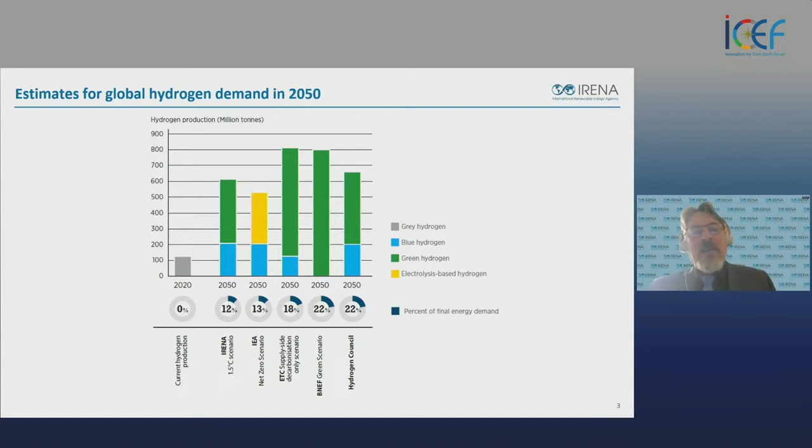We need a smart approach to integrate electrolyzers into power system synergies with renewable energy. Some innovation is needed here, as we looked into at IRENA—you cannot just integrate electrolyzers into the existing energy system and use excess electricity to feed them when there's an oversupply. That doesn't work, because you need dedicated supply for the electrolyzers; you cannot ramp them up and down all the time. There are ideas to use module-based electrolyzer systems, but this still has limitations, so more innovation is needed to better integrate electrolyzers into the energy infrastructure. Next slide.

Given the relative scarcity of green hydrogen and its price, we see priority uses for hydrogen in the end-use sectors, and other sectors should be electrified. Electrification will increase from 22% currently globally to over 50% by 2050, which would allow us to electrify many parts of the end-use sector.

But as I said, some of the sectors you can only go through indirect electrification, meaning using electricity and water electrolyzers to produce green hydrogen.

There we see the dominant use, especially at the beginning, because of the inefficiencies of the value chain to produce renewable power from renewable sources, then to produce through water electrolyzers green hydrogen, and then to produce methanol or ammonia, and then to crack the ammonia again, which is quite challenging in terms of efficiency. That means, given the cost of green hydrogen, it's not yet competitive to fossil fuel-based hydrogen.

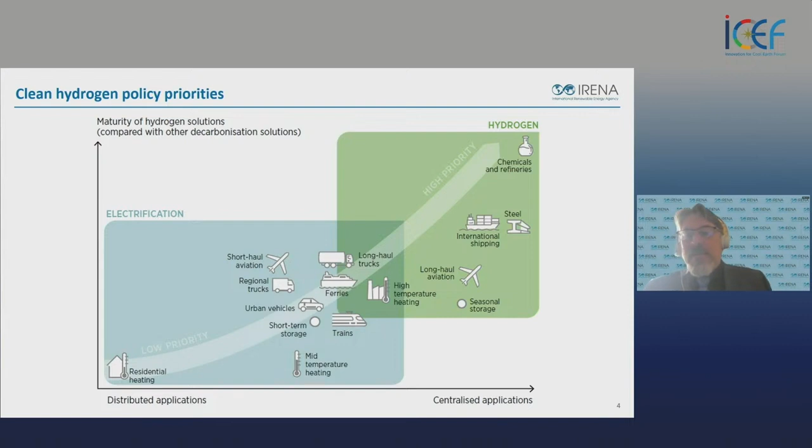In reality, we have to bring down the electrolyzer capex from 1,200 US dollars per kilowatt installed to something like 600 US dollars per kilowatt installed. So there is still a job to do to ramp up the manufacturing of electrolyzers to bring down the capex to create competitive green hydrogen.

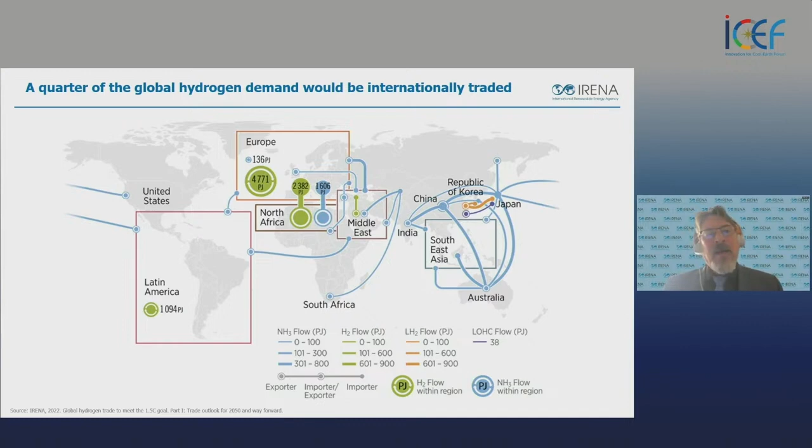This is also specifically important for Japan. I think the hydrogen will come to Japan likely as ammonia, and to a certain part also as methanol. But of course, Japan is using a special technology with liquid hydrogen carriers. Next slide.

The way you transport the green hydrogen depends predominantly on the distance. With a wider distance, over 10,000 kilometers, you end up with ammonia. But at shorter distances, up to 4,000 to 5,000 kilometers, transport over pipelines is also important.

IRENA is working with ports and harbors and also with the shipping sector, with the International Maritime Organization, the International Chamber of Shipping, and the Global Maritime Forum. We are looking into ways of decarbonizing the shipping sector. The shipping sector is quite efficient, also based on heavy sulphur fuel oils, but the shipping sector will play a dominant role in the trading and logistics of green hydrogen between different countries.

There is a big possibility, when this sector moves into the logistics of providing and shipping green hydrogen in hubs and harbors and with ships, that this sector can also be decarbonized. We are just working on a study related to this.

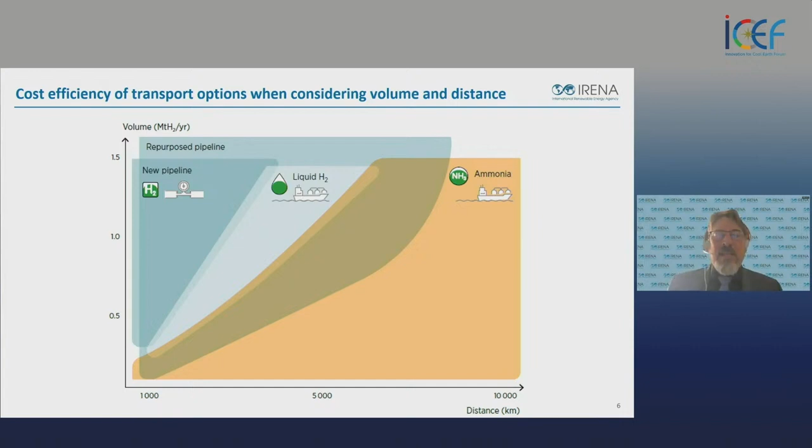In overseas trading, different carriers are included. I mentioned already the ammonia, but also the liquefied organic hydrogen carriers, and liquid hydrogen could become viable. Ammonia is already produced, stored, and traded on a large scale, over 120 ports, and plays an important role in the logistics of hydrogen, specifically with an ammonia infrastructure. Ammonia can be used as an industrial feedstock and as a maritime fuel for power generation, and the cost for transporting hydrogen via liquefied organic hydrogen carrier is comparatively low.

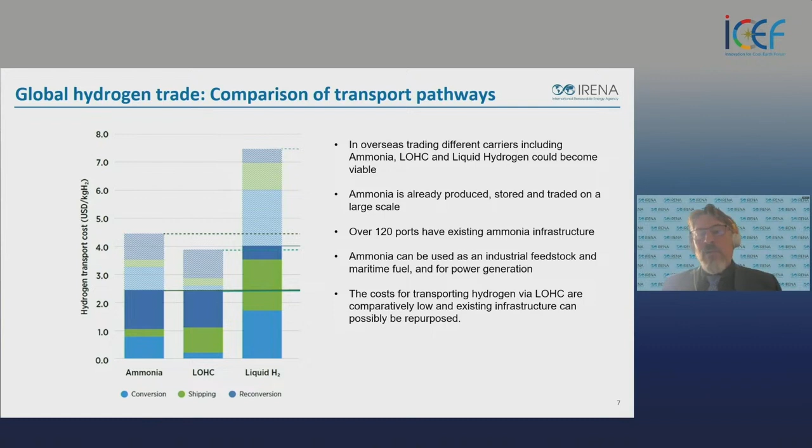We did a study on this on behalf of the Japanese G7 presidency two years ago. Liquefied organic hydrogen carriers have some cost competitiveness advantage, but they are not widely used. Carrying hydrogen through ammonia and methanol is more widely used, and some work still needs to be done to implement more use of liquefied organic hydrogen carriers.

Next slide—Roland, this is your last slide, I think? Yeah, this is my last slide. Just to say, it is extremely important to harmonize the certification and the quality infrastructure.

Certain standards are needed to make sure at the end we are able to create a market for green hydrogen. IRENA is working together with the International Organization for Standardization, also with the International Electrotechnical Commission and many other players, to set up the harmonization of quality infrastructure with elements of metrology, testing, and all aspects of certification and standardization.

That helps to create a green hydrogen market. I think the key challenge is to bring down the cost for green hydrogen, to make sure that more climate finance is used to ramp up green hydrogen production, and to bring more green hydrogen projects to final investment decision.

Only 4% of the projects in development have reached final investment decision, and a lot of work is still to be done to create an international green hydrogen sector to decarbonize the end-use sectors and to achieve the 1.5 degree scenario. I would like to stop here with my presentation.

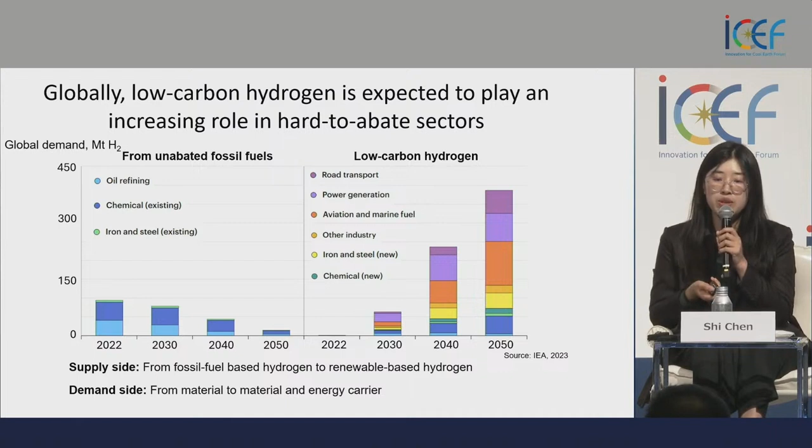The final demand sector will also become more diversified. Besides the existing chemical sectors, in the future the transportation sector—heavy-duty road transportation, aviation, and maritime transportation—will need hydrogen because it has very high energy density and can reach very high temperatures. Applications in industrial sectors like iron and steel, and new chemical sectors, will also increase. So from the supply side, hydrogen will go from fossil fuel-based to also renewable energy-based hydrogen, while on the demand side, hydrogen will become not only a material but also an energy carrier.

This is kind of a chicken and egg problem, because if we don't have low-cost production supply for hydrogen, there is no momentum for the transmission, distribution, and end-use sectors to invest in hydrogen utilization. And without support from the downstream supply chain, there is also no momentum to invest in production. So efforts should be put into every single sector of the entire supply chain to make true progress. Next, I'd like to show an example of renewable energy-based hydrogen, and how to move from the current high cost of low-carbon hydrogen to a future competitive low-cost hydrogen.

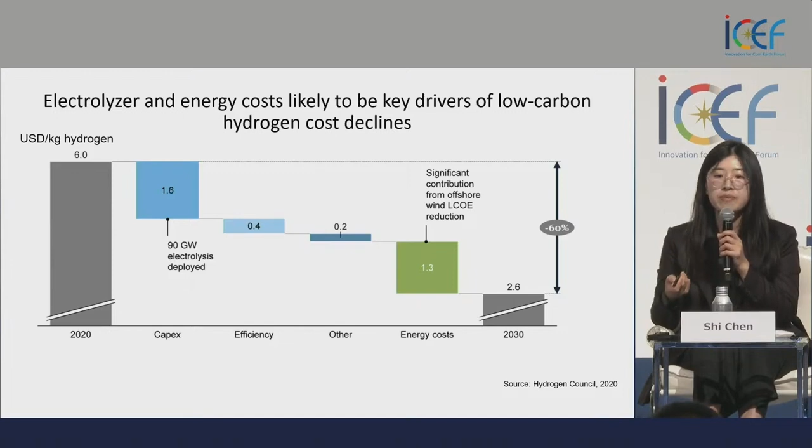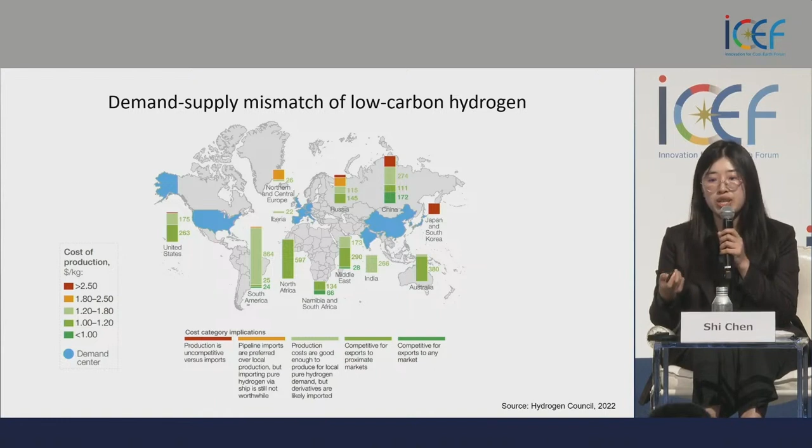Another challenge I want to mention is the key materials utilization in electrolyzers and fuel cells. Here's an example of the PEM, the proton exchange membrane electrolyzer. During the manufacture of this kind of electrolyzer, we need input from platinum and iridium from the supply chain. But currently, all these metals are concentrated and attributed to the supply of South Africa and a few other countries.

So here are two questions ahead of us. The first is how the fluctuation of the cost of these key metals will influence the cost of the electrolyzer, as well as the downstream cost of hydrogen. The second question is whether the economic reserves of all these metals will be sufficient for future massive production of electrolyzers.

Okay, so here I'll summarize my three points.

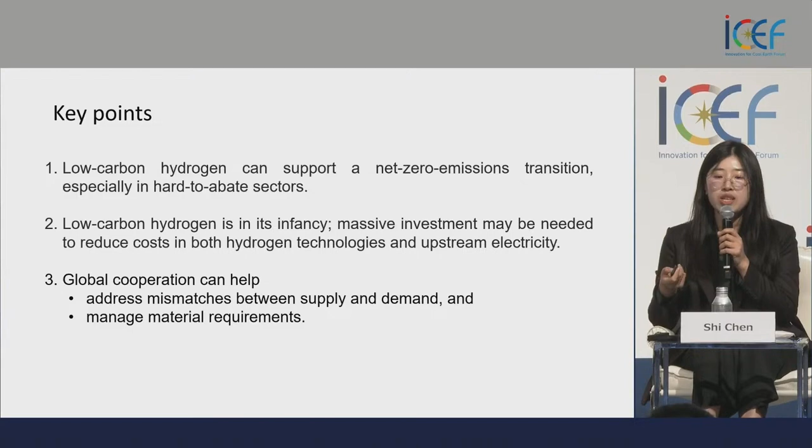First, low-carbon hydrogen can play a role in decarbonizing hard-to-abate sectors. Second, low-carbon hydrogen is still in its infancy, so massive investment would be needed to further reduce the cost. Third, global cooperation would be needed on a massive scale to address the mismatch between supply and demand, and also to manage material requirements. So that's all, thank you very much.

Chen, thank you very much for that really interesting presentation. I think the point you made about minerals and the need for platinum metals, for example, doesn't get a lot of attention. Could you say another word about that? Do you think that the supplies could be diversified? Do you think that innovation is possible so that different metals would be used?

Definitely. I think two efforts would be needed. The first is technology advance. For example, if we have a higher efficiency electrolyzer, proportionally we will need less electrolyzer into the future, so we'll release the pressure on the metals. Additionally, we will also need market mechanisms from a global perspective. For example, we could have long-term contracts to ensure the price fluctuation of these metals wouldn't be transferred to downstream utilization.

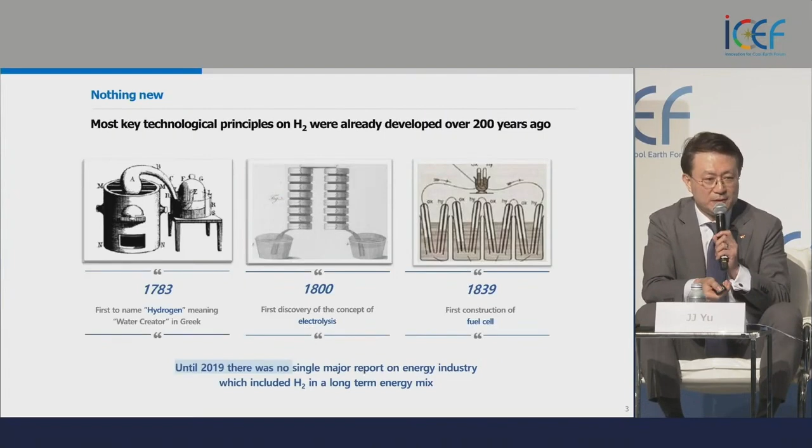Okay, because time is running out, I'll move into the main point. This is an old concept, but it was only in 2019, just 5 years ago, that it suddenly got attention—hydrogen. Before this, there was no single major report to include hydrogen into the long-term energy mix. So it was only 5 years ago that it got attention. At that time, as I mentioned, this was first hype, but already this year and last year, people began to talk about make or break.

I think it's a lot of reasons after COVID, economic situations, but a lot of progress has been blocked and setbacks. Why is it happening? I believe everyone can remember this hydrogen shot, 2021. The Department of Energy in US announced their hydrogen shot 111, making 1 kilogram of hydrogen at $1 in 1 decade. That was June, and in July I met with the director of this DOE. He was very confident he can achieve this goal, and he explained the detailed plans of how they can reduce the cost of each component of the value chain, manufacturing, especially electrolysis.

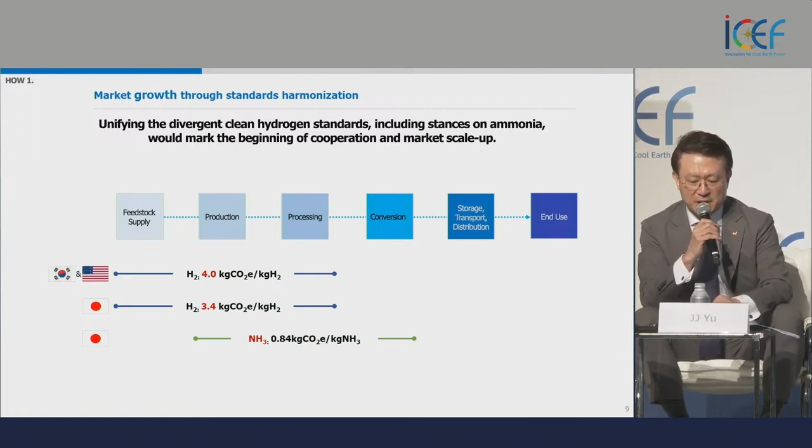Chen also mentioned everyone says huge investment is needed, but how we can draw or invite those investments starts from clear definitions and regulatory frameworks, so that commercial players can see the bigger market and have bigger investment potentials.

Some regions can still produce hydrogen at $2 or $3, below $3, but I'm talking about the overall general level of production. So with the US as an exporter and Japan and Korea as importers, if we work together, I think we can create a lot of progress in this hydrogen frontier.

Korea has been advanced in developing this regulatory framework, and already 3 years ago we started this. The program now is through KEPCO, which is buying hydrogen additions in power generation by subsidizing the cost gap between traditional and this more expensive hydrogen-added power generation. Bidding already started, so sooner or later, latest from next year, this program will really be executed. The Korean government is very committed to this further progress.

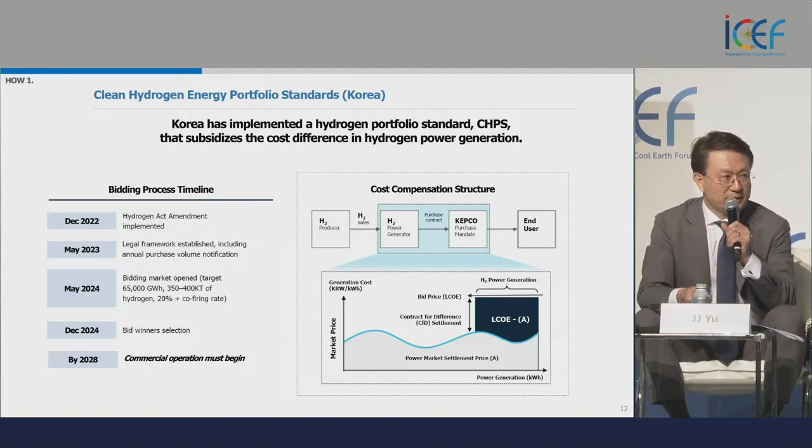It's always about the money - how you're going to allocate subsidies and funding between renewables and hydrogen. There are a lot of competing items to get more subsidies. That's why I'm saying, like the Chinese government developed the electric vehicle industry with substantial, consistent support programs so we can have predictability. That might be the incentive for commercial players to join this region.

Because I'm talking about Japan, Korea, US collaboration - Muraki-san is my senpai and knows a lot about this area - Japan and Korea, for example, will import, as many people have already mentioned, ammonia, which might be the most effective and efficient carrier to import hydrogen. But Korea is already importing more than 1 million tons of ammonia, whereas Japan is only importing less than 300,000 tons per year.

In the western part of the Japanese island, it's a shallow sea area. Korea is closer, and for example Ulsan port has large tank terminals for ammonia, so bulk breaking from Ulsan might lower transportation costs by 20%.

I know Muraki-san will explain further details about this area, so there are many areas where we can collaborate together in technology or regulatory framework rule setting - and in electrolysis, whether it's SOEC or other areas, there are many areas we can combine.

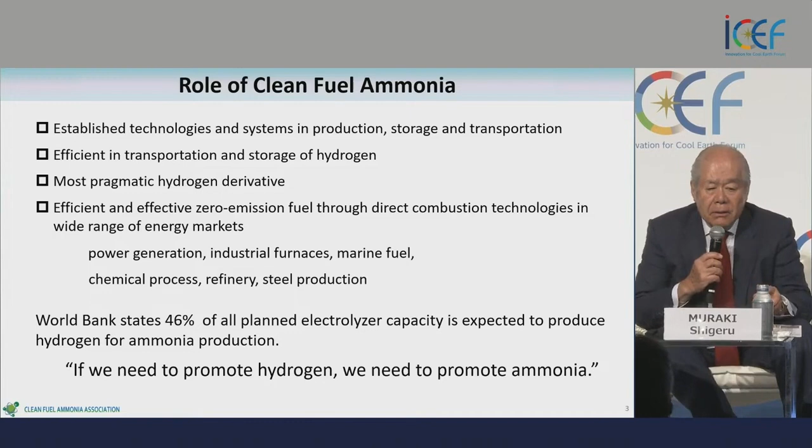Technologies for direct combustion - ammonia substitution in coal-fired boilers. JERA conducted a large-scale demonstration in their 1 gigawatt coal power plant with a 20% mixture of ammonia, and they confirmed emission control: no increase of NOx emissions, no N2O emissions, and no unburned ammonia. So they are now moving to the commercial phase.

They will start commercial use of ammonia around 2027, and the main target for power generation is gas turbines. Two companies are working on that, developing 2 megawatt to 60 megawatt gas turbines very well, and single fuel gas turbines will be developed by around 2025. 300 to 400 megawatt large-size combined cycle gas turbines will take a little more time, through the 2030s, when I think the lineup of gas turbines will be ready for the market.

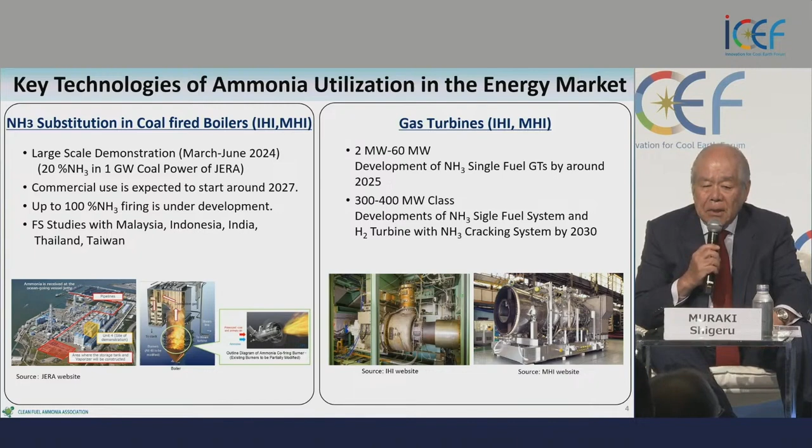And for industrial furnaces, Taiyo Nippon Sanso is working with Asahi Glass on development of ammonia single fuel burners, and they will finish the development of the burners in 2025.

And a very important development is marine diesel engines. Small 4-stroke engines have already finished development, and one was installed in a tugboat by NYK in August this year. They are conducting safety tests of ammonia utilization in the engine room.

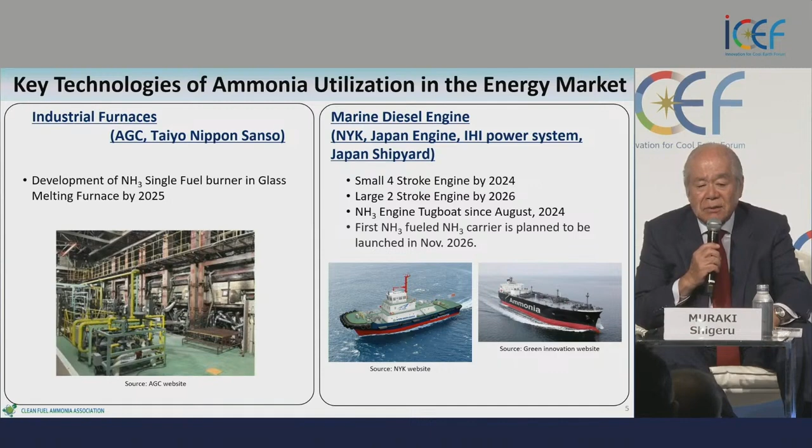And the large diesel engine will be finished by 2026, and the first ammonia-fueled ammonia carrier is planned to be launched in November 2026. The Japanese government is preparing about 3 trillion Japanese yen for 15 years.

That's about 22 billion US dollars, to subsidize the cost difference between ammonia or hydrogen and existing fuels for the first movers, starting by 2030. And ammonia has a lot of supply potential projects, and they are working to propose to this CFD program.

And on the market side, we are planning the hub and spoke system. Now 6 areas and 8 terminals are proposing the hub terminals. And as JJ mentioned, the chart doesn't show the Korean part, but I think Korea and Japan can share the hub terminals to deliver ammonia to various areas of demand.

The demand forecast in Japan for 2030 is 3 million tons, mainly from coal power plants. We are working on collaboration between Japan and Korea for supply chain development, seeking conditions for a long-term contract with a price formula, particularly for blue ammonia from the United States, and we are planning to use the Henry Hub price.

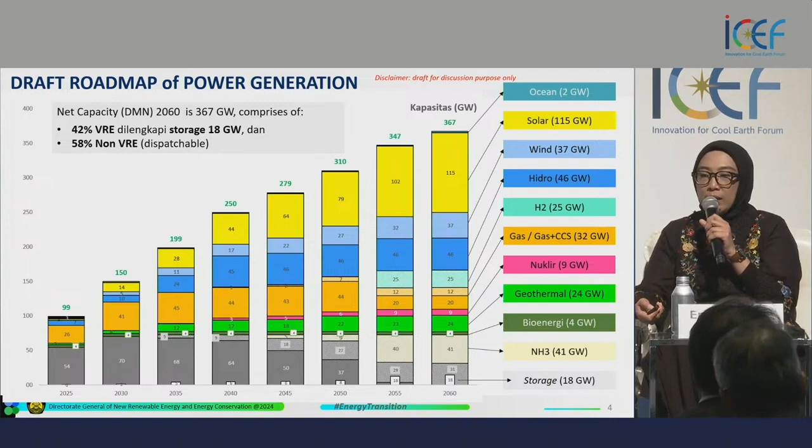So we replace it with the renewable one. Hydrogen would be 25 gigawatt, and ammonia would be 41 gigawatt if we're talking about electricity uses. And of course, now we have a national strategy of hydrogen.

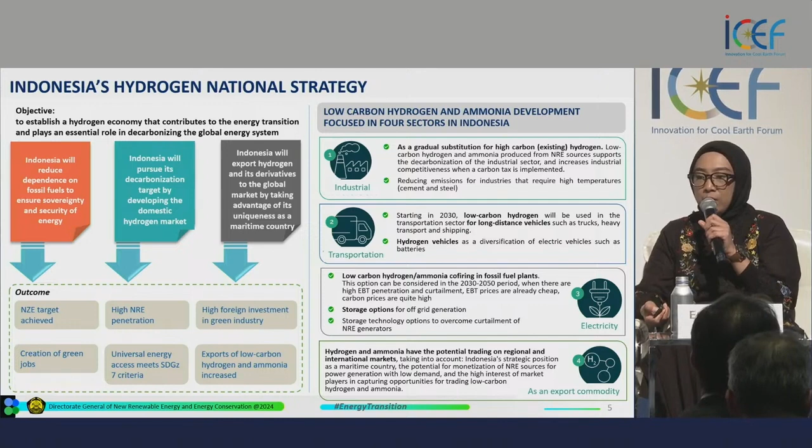In the first step, we will go into the export market, then we're creating the domestic market, with uses in industrial, transportation, and electricity, and also as a commodity. So we have a demand for hydrogen right now.

The biggest user of hydrogen is the fertilizer industry. Now we also export ammonia to other countries. Regarding our analysis, we have potential to export hydrogen and ammonia. We will have a detailed hydrogen and ammonia roadmap, because we will definitely go with net zero emission in 2060.

There are many commitments to reduce coal use in our electricity and industry, and we have an action plan for hydrogen. We start with initial steps, then move to a sustainable hydrogen future by 2060. In between, we will build infrastructure, integration, and need collaboration with other countries to make a more mature hydrogen ecosystem.

Now we have 21 locations where we optimize electrolyzer use in power plants, creating green hydrogen there. The first one comes from geothermal, located at Java Island. So we have green hydrogen production from geothermal.

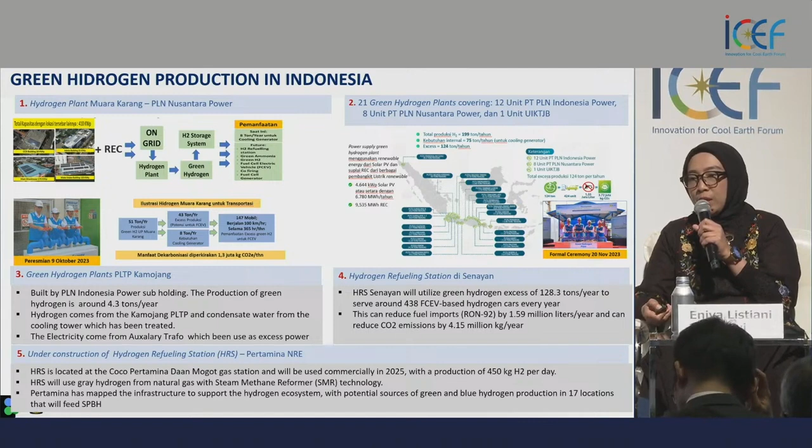From early this year, we have the first hydrogen refilling station, and next year we will have a hydrogen road test in Jakarta. So maybe you can visit Jakarta—this is on a main road of Jakarta.

We also started a hydrogen center. Many people are now enthusiastic about hydrogen in Indonesia as well, and we're creating many training facilities at this location.

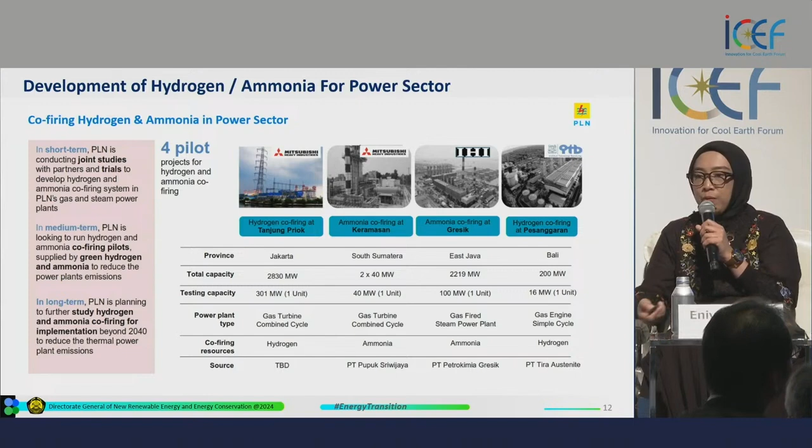Regarding our collaboration in the industrial sector, there are many hydrogen pilot projects using co-firing hydrogen and co-firing ammonia in the power sector. We collaborate with Mitsubishi, IHI, and four other pilot projects, a few of them funded by NEDO and so on.

We are also thinking about ammonia bunkering production, and we now have a plan in the north part of Sumatra Island, which has a big user of hydrogen in the fertilizer industry. So we want to make green ammonia at that location.

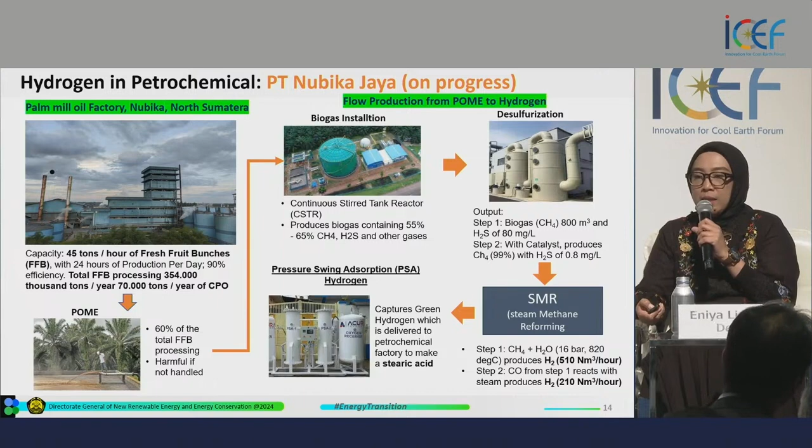In the east part of Java Island, we have petrochemical industry in Gresik, and we are progressing hydrogen production from biogas, because we have abundant waste from the palm industry, much more on Sumatra Island. There are many studies, and we already have a lot of biogas installations.

The last thing I want to share is that we are creating standards, including the standard of ammonia and the standard of hydrogen. We have preparation of many regulations that we will implement in Indonesia, and there is much enthusiasm from industry to support this regulation. Thanks for the collaboration.

Finally, Indonesia has made a statement on hydrogen globally by joining APEC. All APEC countries now have guidance to develop and implement clean and low carbon hydrogen policy in the Asia Pacific. This is a good movement to creating an ecosystem, and Indonesia also wants to be part of the global supply chain.